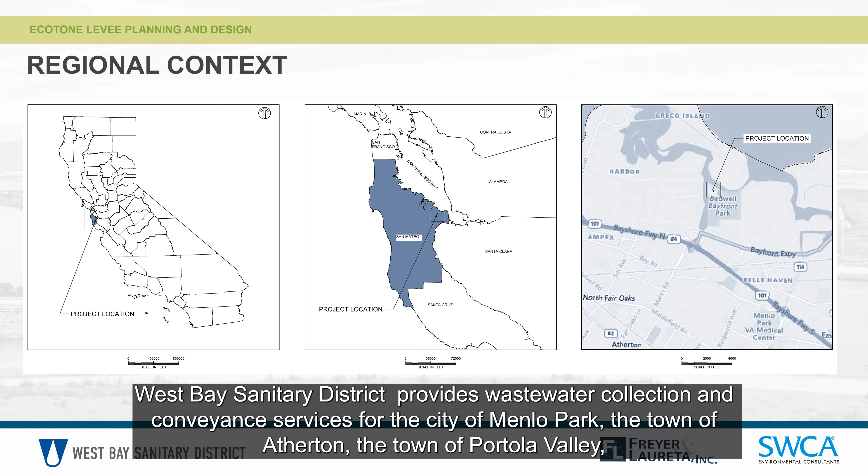West Bay Sanitary District provides wastewater collection and conveyance services for the city of Menlo Park, the town of Atherton, the town of Portola Valley, and areas of East Palo Alto, Woodside, and unincorporated San Mateo and Santa Clara counties.

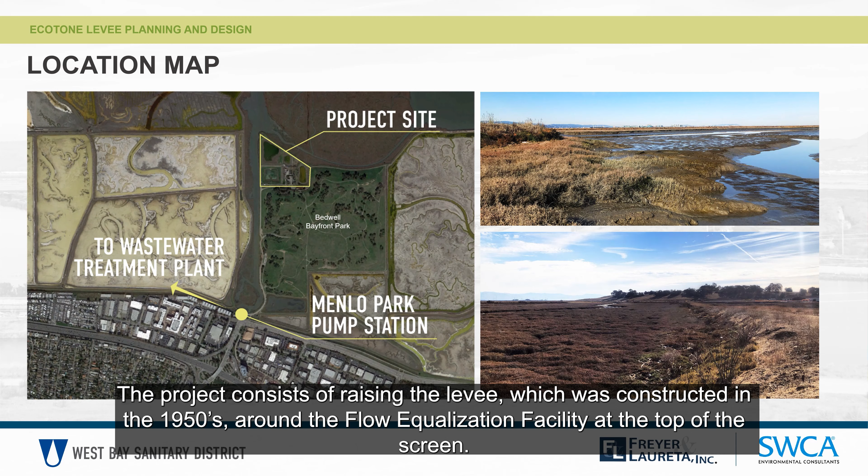The project consists of raising the levee, which was constructed in the 1950s around the flow equalization facility at the top of the screen. The site is adjacent to sloughs right in the bay and the Bedwell Bayfront Park.

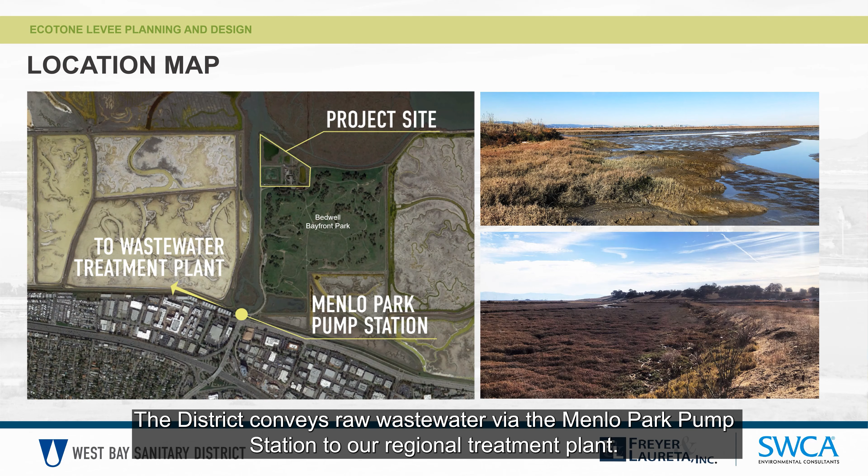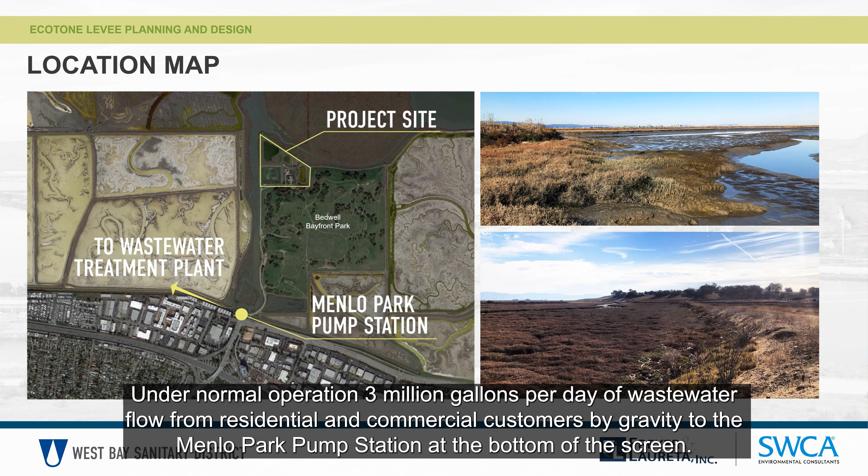The district conveys raw wastewater via the Menlo Park pump station to our regional treatment plant. Under normal operation, 3 million gallons per day of wastewater flow from residential and commercial customers by gravity to the Menlo Park pump station at the bottom of the screen. It then gets pumped to the regional treatment plant, Silicon Valley Clean Water.

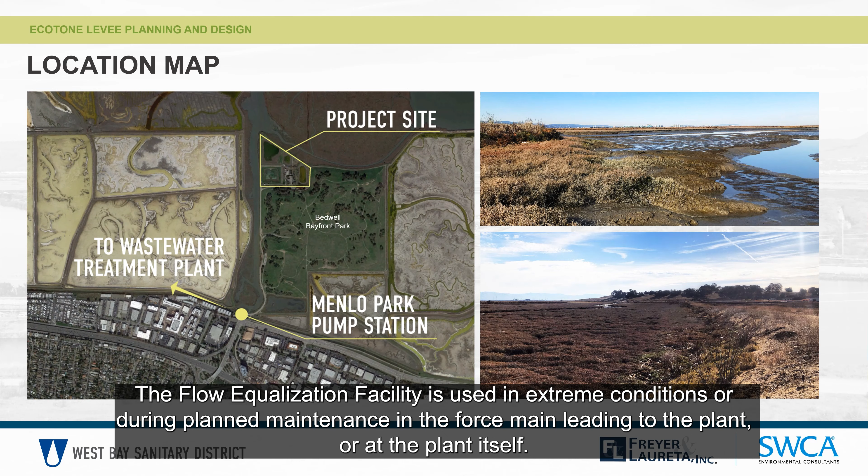The flow equalization facility is used in extreme conditions or during planned maintenance, in the force main leading to the plant or at the plant itself. Now buckle up and let's fly over the site to have a better understanding of this exciting project.

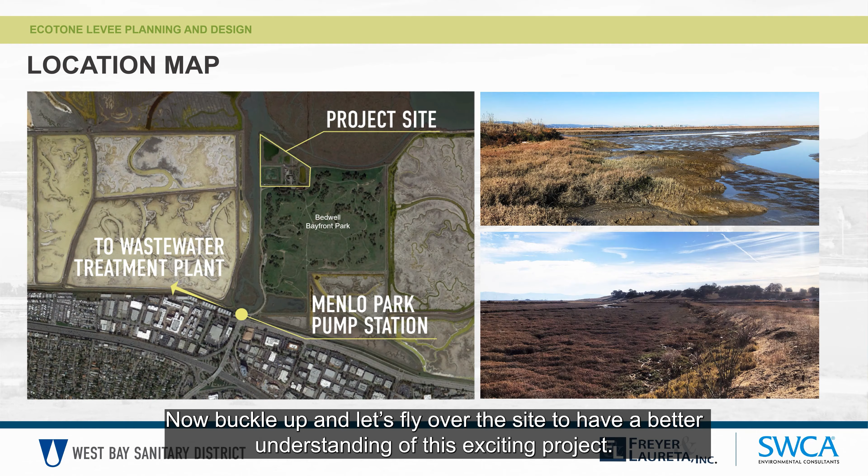One of our facilities includes this flow equalization facility, which serves as a temporary wastewater storage facility when the regional treatment system cannot accommodate our flows.

If the site is impacted by the effects of climate change, residents will have interruption in wastewater service during extreme flood events. These flood events may result in backed up sewer lines, discharges of raw wastewater to adjacent communities, and other water quality environmental impacts, including the potential for cross-contamination from the facility to the bay.

For this reason, West Bay Sanitary District intends to perform levee improvements by creating a living shoreline and ecotone levee to protect the district's facilities and the San Francisco Bay by removing the facility from the current 100-year floodplain and safeguarding against future sea level rise.

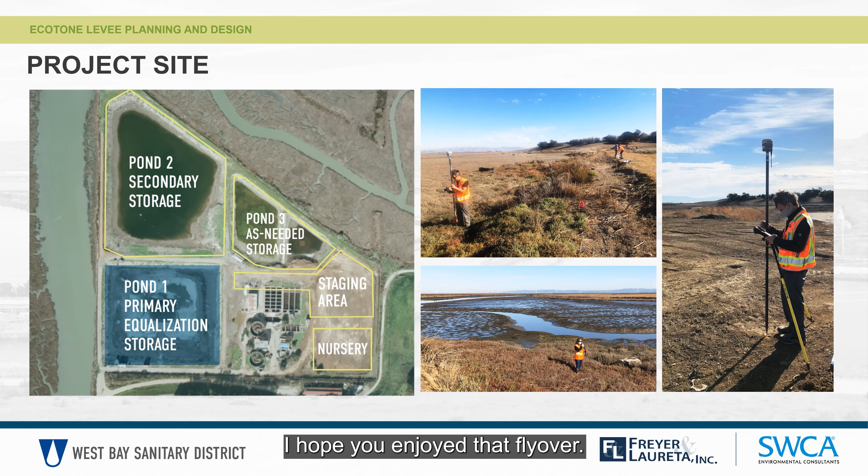I hope you enjoyed that flyover. Now, the facility was previously a wastewater treatment plant, but is currently used for wastewater flow equalization, wastewater management, a Save the Bay nursery, and storage for the district's materials and equipment.

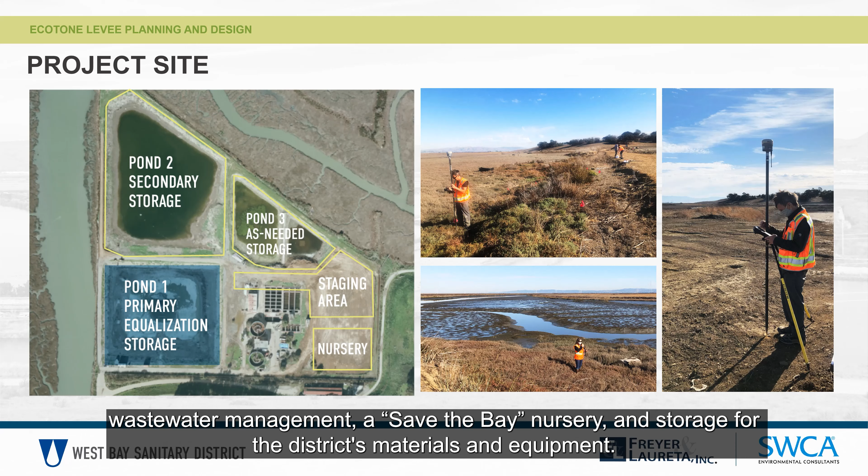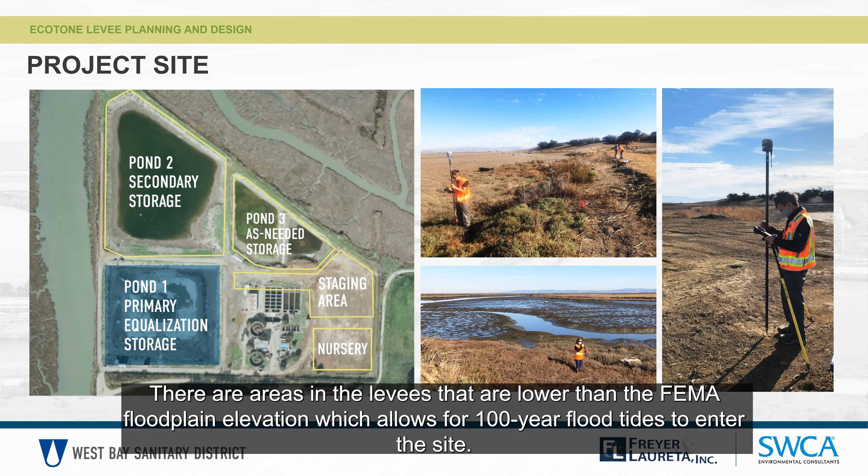Currently, the facility is protected by levees. There are areas in the levees that are lower than the FEMA floodplain elevation, which allows for 100-year flood tides to enter into the site. Furthermore, the levee is not protected against sea level rise.

Raising the levee is a priority, and we've come up with valuable ways to protect the site and create shoreline resiliency. Thank you so much for your time.

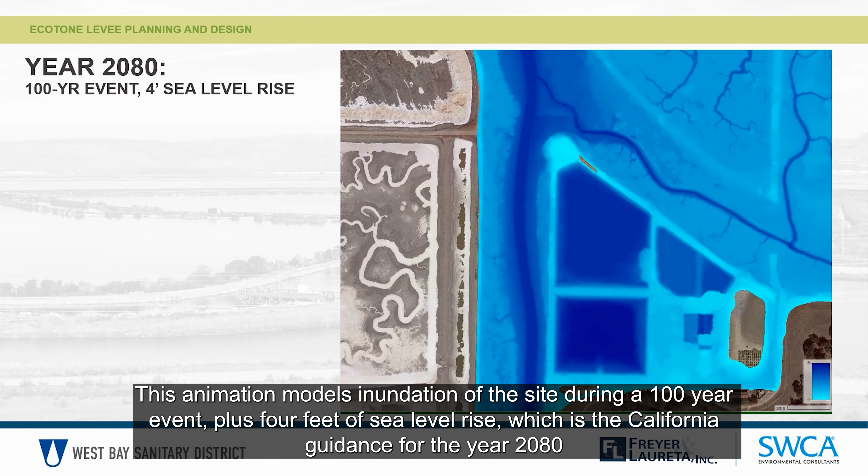This animation models inundation of the site during a 100-year event, plus 4 feet of sea level rise, which is the California guidance for the year 2080 for medium to high risk aversion, assuming low emissions and a peak water surface elevation of 14.69 feet NAVD 88.

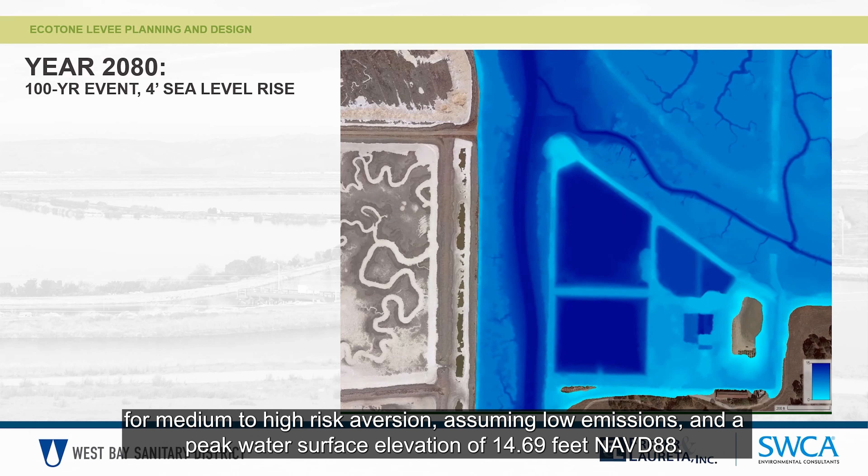To design the levee improvements to be resilient to sea level rise while continuing to provide valuable marsh habitat, we have designed an Ecotone levee. The project will raise the grades of the perimeter access road along the existing levee to promote shoreline resiliency.

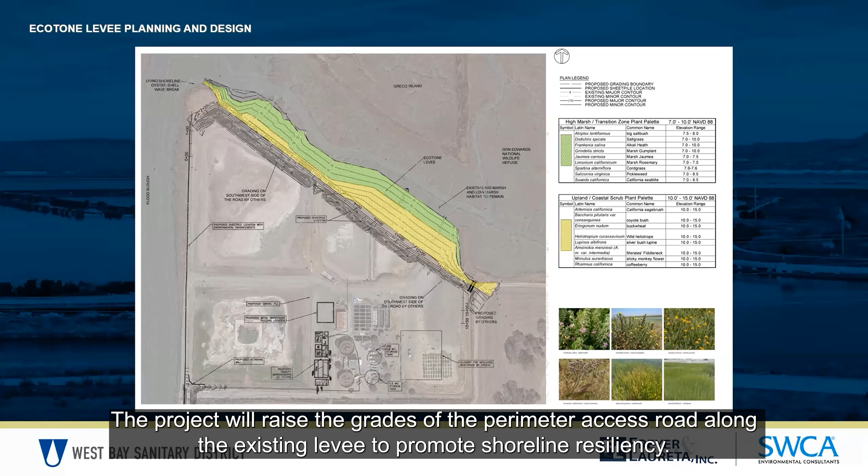The living shoreline will stretch from the levee crest to the marsh surface and will provide a wetland-upland transition zone when vegetated with native coastal scrub in the upland and high marsh plants in the transition zone.

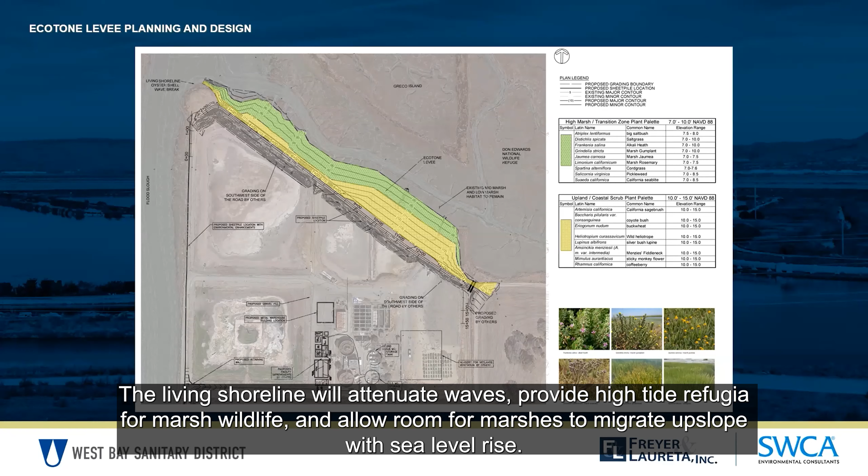The living shoreline will attenuate waves, provide high tide refugia for marsh wildlife, and allow room for marshes to migrate upslope with sea level rise.

The Ecotone levee essentially provides a ramp from the new levee elevation down to the marsh. Higher elevations adjacent to the new levee will provide an area for the marsh to migrate over time with sea level rise.

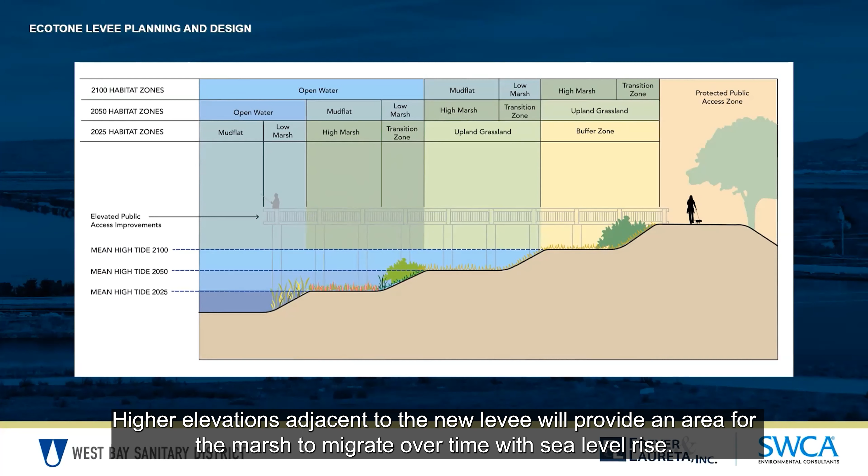While the salt marsh is a natural community, the man-made levee is dominated by sparse, non-native vegetation and subject to regular human disturbance, which diminishes the habitat value of the levee.

The project will create a wider upland transition zone planted with native vegetation between existing salt marsh habitat and the levee on the north side of the project site.

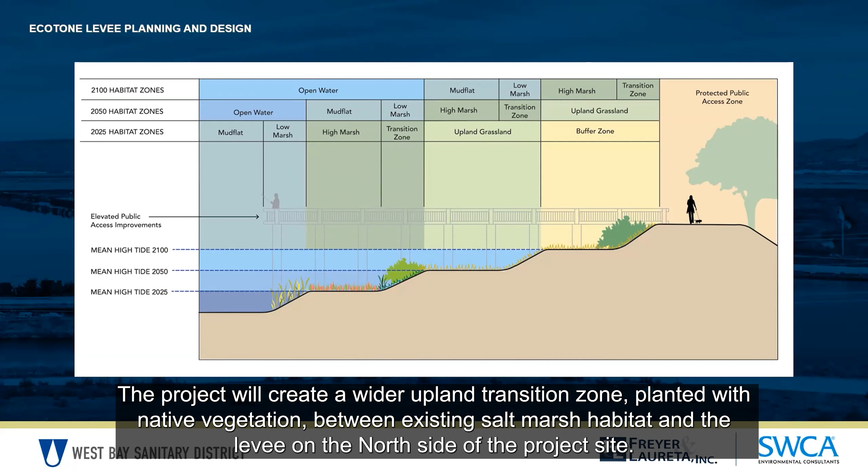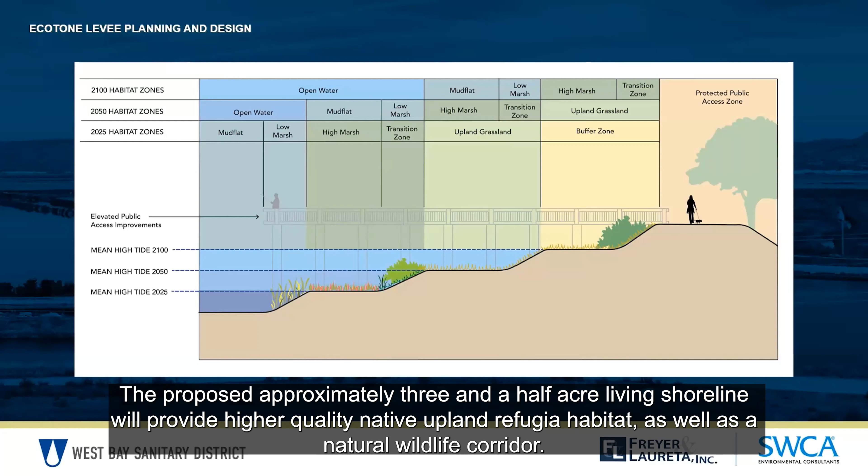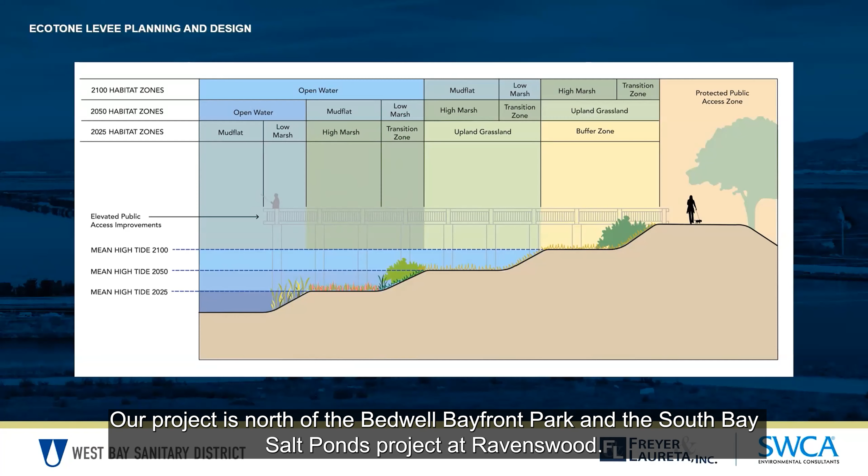The proposed approximately 3.5-acre living shoreline will provide higher quality native upland refugia habitat as well as a natural wildlife corridor. As Sergio mentioned, this Ecotone levee is part of a regional effort to extend resilient living shoreline around San Francisco Bay. Our project is north of the Bedwell Bayfront Park and the South Bay Salt Ponds project at Ravenswood.

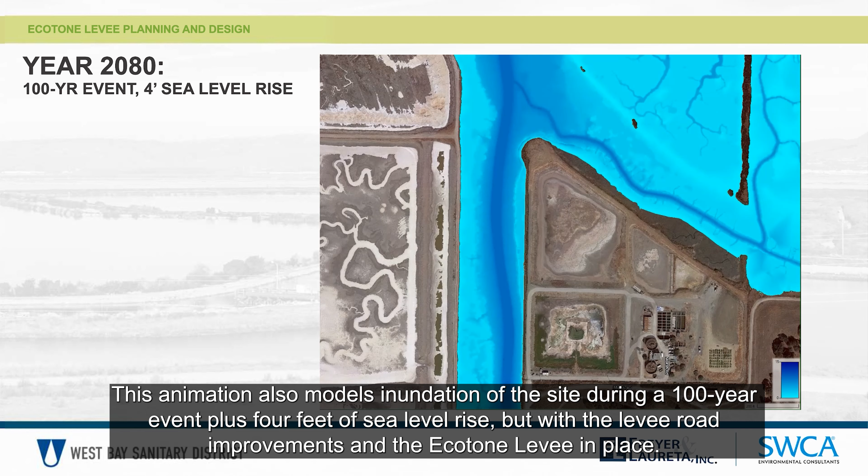This animation also models inundation of the site during a 100-year event plus 4 feet of sea level rise, but with the levee road improvements and Ecotone levee in place.

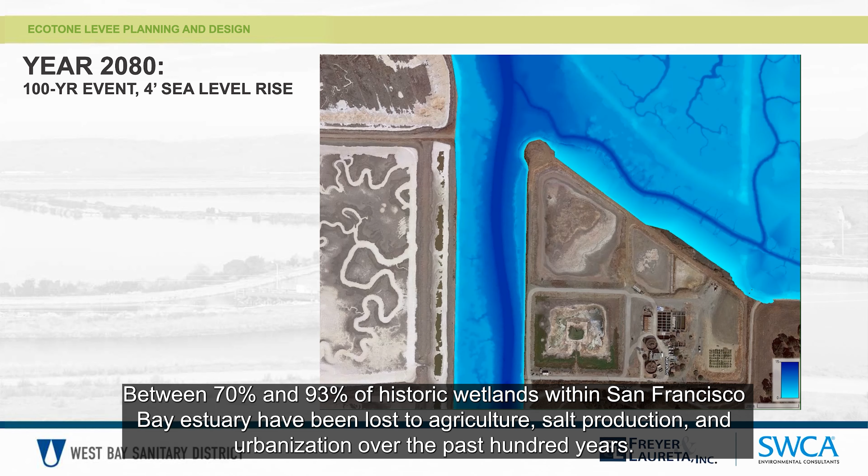Between 70% and 93% of historic wetlands within San Francisco Bay estuary have been lost to agriculture, salt production, and urbanization over the past 100 years.

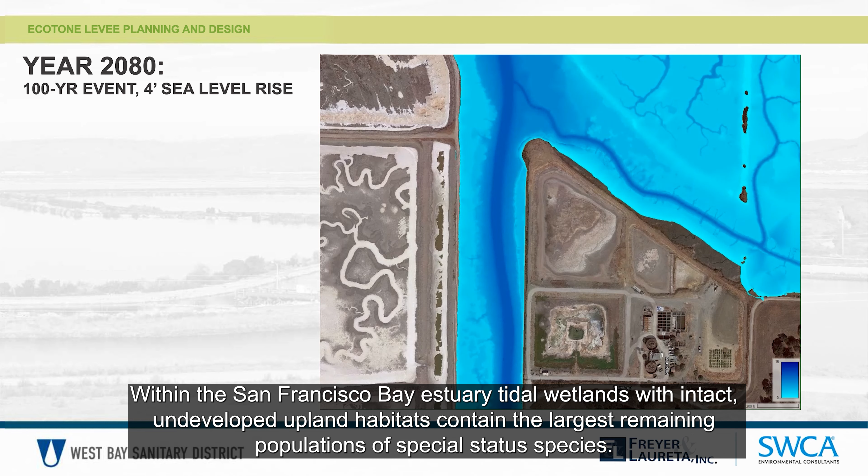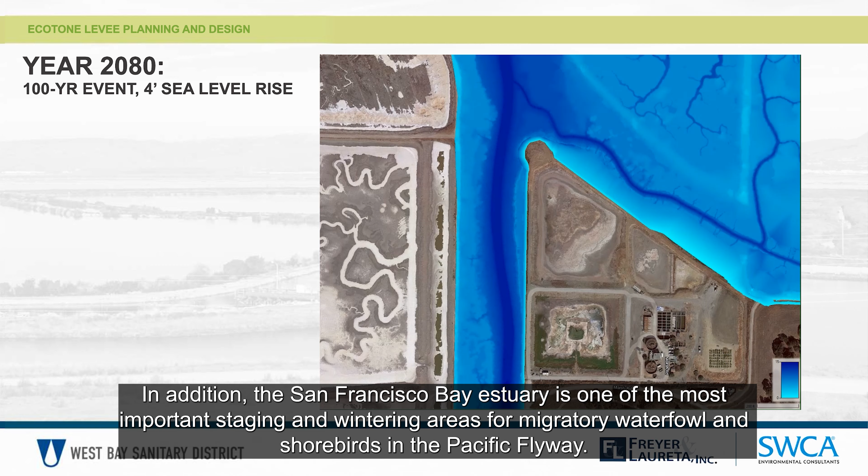Within the San Francisco Bay estuary, tidal wetlands with intact, undeveloped upland habitats contain the largest remaining populations of special status species. In addition, the San Francisco Bay estuary is one of the most important staging and wintering areas for migratory waterfowl and shorebirds in the Pacific Flyway.

Construction of the project will mitigate for permanent loss of wetlands from projected sea level rise.

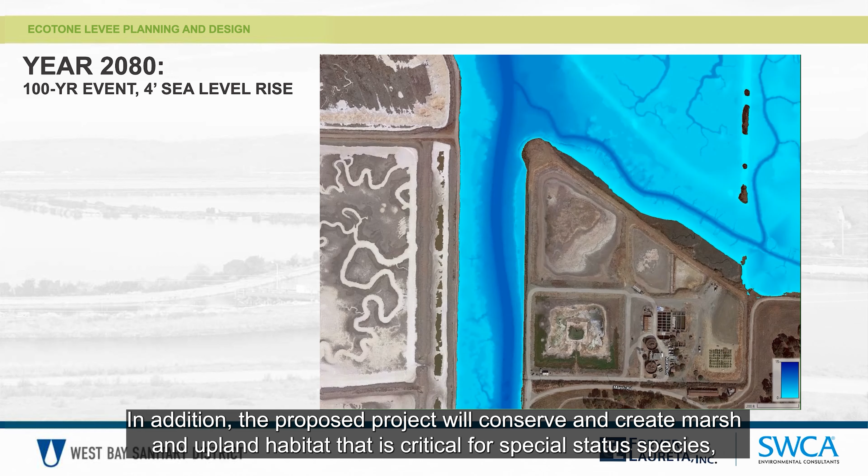In addition, the proposed project will conserve and create marsh and upland habitat that is critical for special status species such as salt marsh harvest mouse and California Ridgway's rail, fish, and migratory birds, in addition to protecting the bay from serious raw sewage contamination occurring when storm surge and sea level rise breach the flow equalization facility.